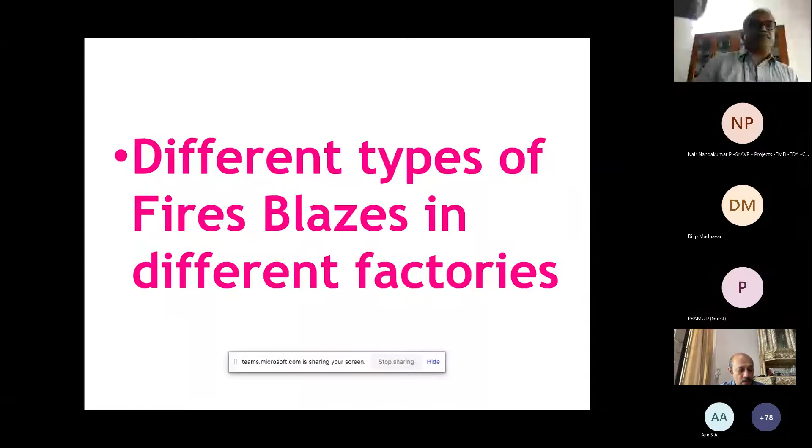Some different types of fire incidents happened in various factories. I am not mentioning the name of the factories, but the processes I have mentioned here, and somebody may identify the factory. That is not a problem at all, because the only thing we mean is what is the key behind this disaster. Paint factories, plastic industries, oil and gas industries, pesticide industries, solvent extraction plant fire incidents, refrigeration plant industry accidents, steel plant accidents, petrochemicals, etc. So many accidents we go through, and so many parameters were involved in the disaster event.

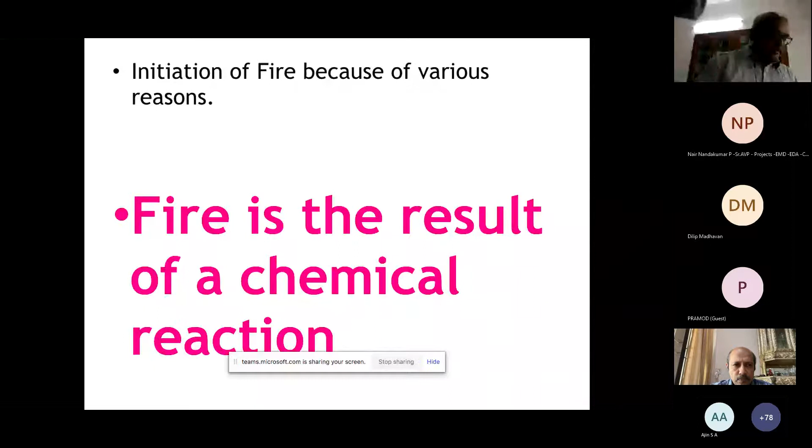Fire is the result of a chemical reaction. Normally in a reaction, reactants are there, products are there, and some energy is also released to the atmosphere. One or more substances, called reactants, are converted to one or more different substances known as products. In some fire incidents, fuel is there, oxygen or air is available, and a reaction occurs. It comes to, normally we say, carbon dioxide and water with some energy released to the atmosphere, and that fire energy creates the problems.

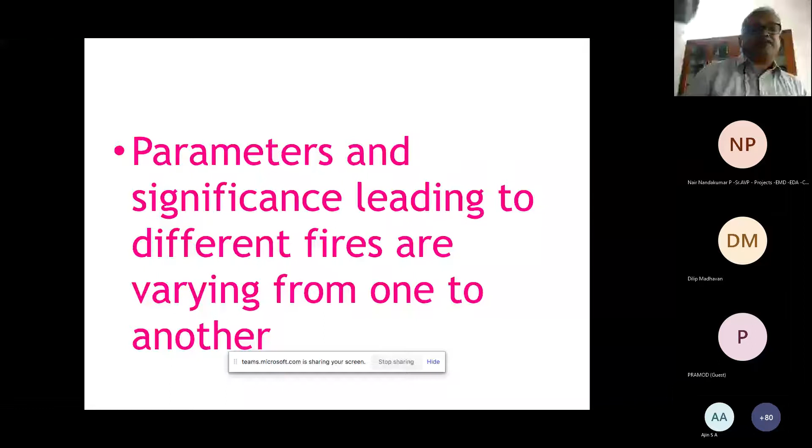The parameters that are significant leading to different fires vary from one industry to another. So the paint industry fire is not relevant to the plastic industry, and the root cause of each one is entirely different. Suppose I take the case study of a fire in a solvent extraction plant.

What happened in that plant is that oleoresins are extracted from spices, and the semi-finished goods are kept in a godown. That godown is supposed to be kept at around 20-degree temperature, in a climatically controlled space. But what happened? The oil extracted from the spices has some traces of solvent present in it. This trace of solvent is vulnerable for a fire incident, so we have to be very careful.

One fine night, with the storage temperature around 20 degrees Celsius maintained with the support of the AC or cooling system, the material stored inside the storage area released a small trace into the atmosphere. That means a minute trace of solvent was released.

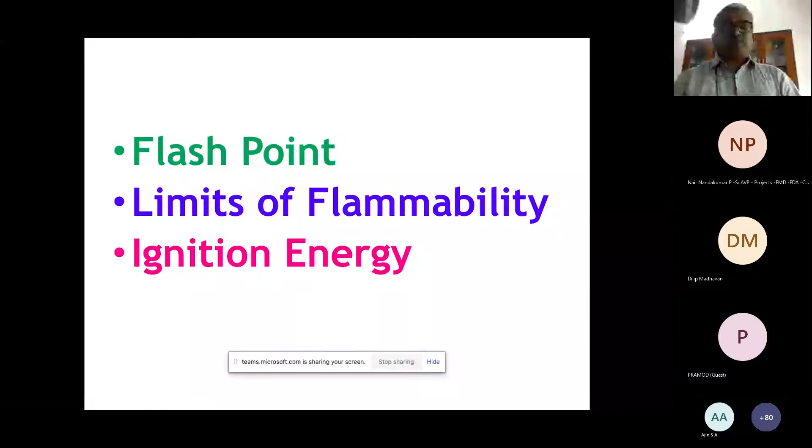But what happened is that on that fine night, the vapors mixed with air, and as some sort of ignition energy was attained, the entire storage system and factory went into a fire. This is why we should have controlled storage, controlled temperature storage areas, because this can generate this type of fire incident.

Normally we don't identify such hazardous areas in our factories, because only a small amount of oil is involved, and the spice oil itself is not a fire hazard to some extent. But the solvent present in that trace amount started to burn. From this, the three points I have are flash point, ignition energy, and limits of flammability.

The significance of these 3 parameters is very important while considering solvent fires in the industries, because the lower flammable limit is around 1 to 2 or 3%, and the upper flammable limit will be around 8%. That means between 2 and 8, the chances for a fire is high, because the air is always available in this area.

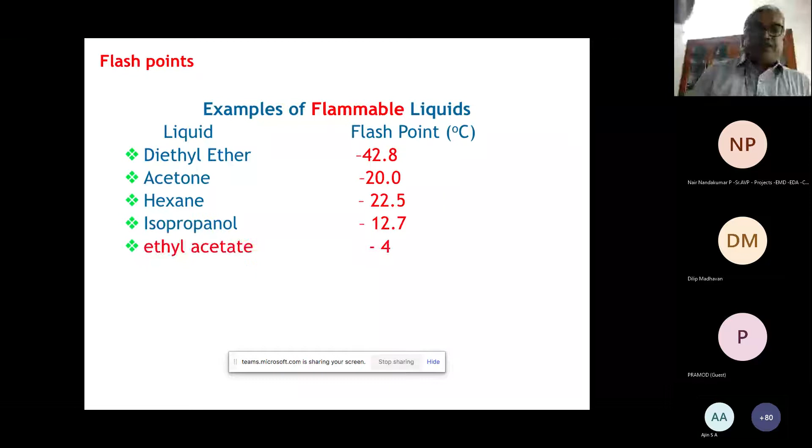Some examples: diethyl ether -42, acetone -20, hexane -22.5, ethyl acetate -4. You have to look into all of these. This means all these solvents are ready for initiating a fire if additional energy is contributed to this atmosphere.

These minus degrees are the flash points. The atmospheric temperature is around 25 or 30 degrees. We have to understand how much lesser amount of temperature all these solvents need. We must be very careful, because in these cases also only a lesser amount of solvent vapor is required.

Most of the solvents are heavy vapors. They will spread around the lower region, and air is always available there. Then the only additional requirement is energy. What is the energy? The unit of energy is joule.

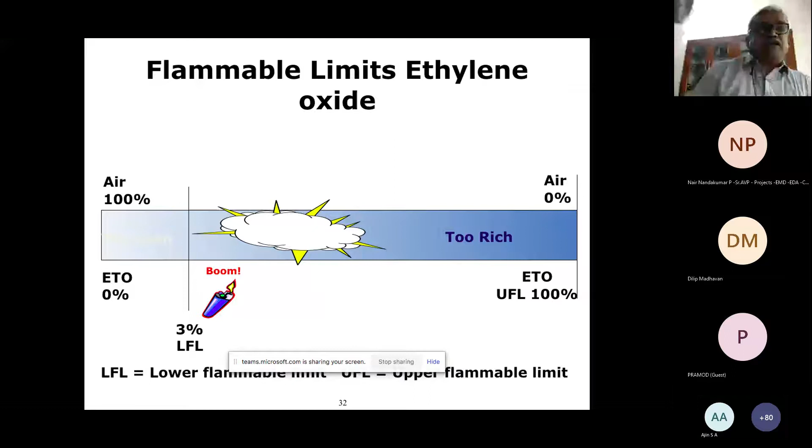In some cases, we can see ethylene oxide, acetylene, etc. They have no upper limit. No upper limit means that type of fire can happen anywhere, even without the presence of oxygen. In a confined area, this acetylene gas can give a flame or explode in any area.

But in other cases, we can see there is a defined region, and that region is very important. For LPG it's 2.1 to 9.5, for gasoline 1.4 to 7.6, and for ethyl acetate 3.5 to 15. That region is very important.

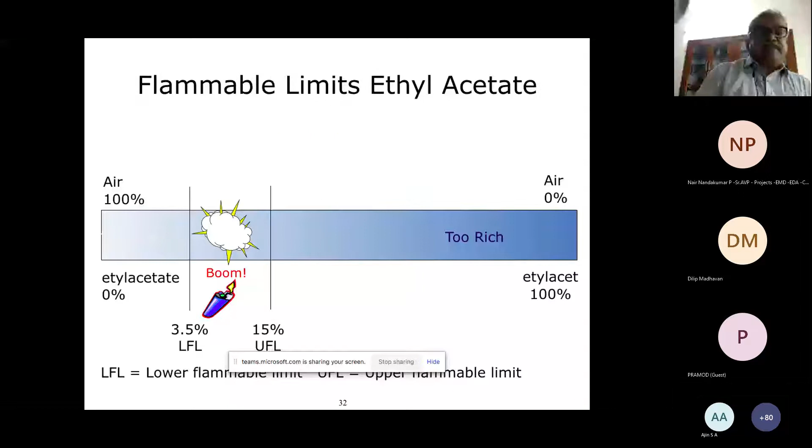This region is, first of all, a chemical reaction. Chemical reaction means some reactants are required, some stoichiometry calculation is required for the initiation of a fire. What is the stoichiometry? That is very important, which I can mention here. For the ignition energy, the energy is also very important - the lowest amount of energy required for ignition.

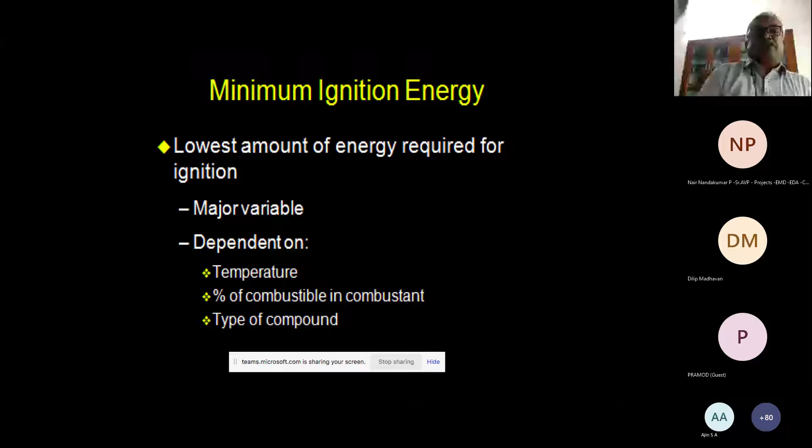Millijoules means how this energy we can explain - that is very important. For discharge to ignite an explosive atmosphere, there must be enough energy. The minimum ignition energies of most hydrocarbons, gases, and vapors range from 0.1 to 1 millijoule. You should carefully listen: 0.1 to 1 millijoule. The level of methane is 0.29 millijoule. A person walking across a carpeted floor can develop a potential difference large enough for a 40 millijoule discharge - more energy than it takes to ignite methane.

That is also something we must be very careful about. A person simply walking across a carpeted floor can generate energy more than the required energy for initiation of a fire - that is very important. Humans generally only sense discharges of 0.6 millijoule or more.

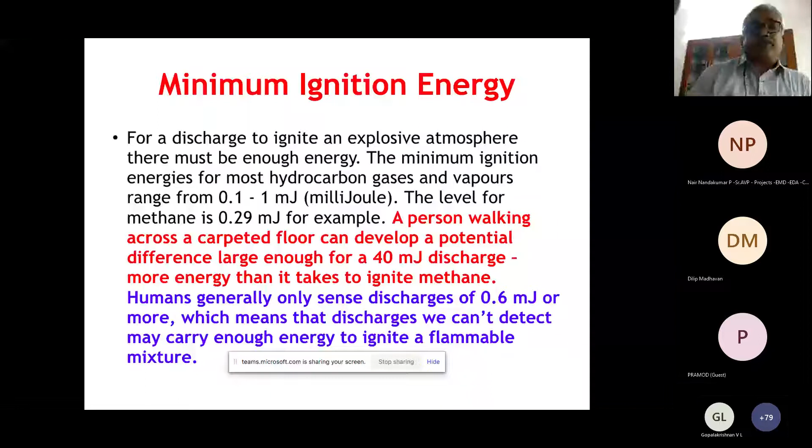Once fuel and oxygen are present, an ignition source is needed to complete the fire triangle. Hydrocarbons can be ignited two ways: when an external ignition source with sufficient energy to ignite the fuel-oxygen mixture is available, in the form of flames, sparks, etc., or when the temperature is raised above the auto ignition temperature - as I already told you, auto ignition, flash point, and fire point.

These three are very, very significant, and we shall look at an incident - a carbon disulfide accident in one of our industries. In that case, what happened is some carbon disulfide fire had some issues. Because the carbon disulfide fire occurred, we could not identify it with our normal eye, so it required smoke detection or radiative heat flux sensors.

CS2 flames produce negligible smoke, like a hydrogen fire - hydrogen fire also is like that, there is no smoke at all. It is relatively non-luminous also in nature, and it shows lower emissivity, and therefore results in lower radiation from the flame.

CS2 is highly flammable. Actually, in CS2 tanks we are supplying water. We take out the CS2 with the help of the top part. We are using the water, and we are processing with water. Then only we handle the CS2.

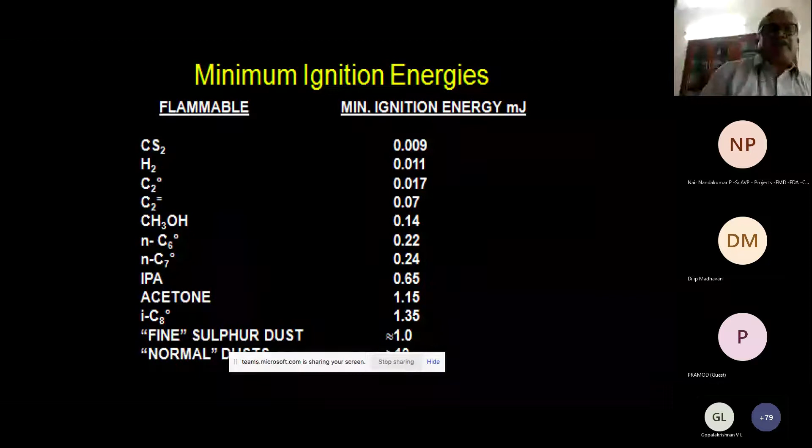Like hydrogen fire - what happened in the factory: the dummy flange of the product transfer line was removed while unloading carbon disulfide, causing carbon disulfide to spurt through the butterfly valve. Being a highly inflammable liquid with a flash point of about -30 degrees Celsius.

That is very important - carbon disulfide transforms into vapor state immediately. This is also a highly flammable solvent. The vapor could have come into contact with a hot body, forming a vapor cloud, causing the explosion. Subsequently the fire engulfed. When it reaches the auto ignition temperature, there is no need for ignition by spark energy - that is also very important. At the auto ignition temperature, the carbon disulfide fire occurs in that industry.

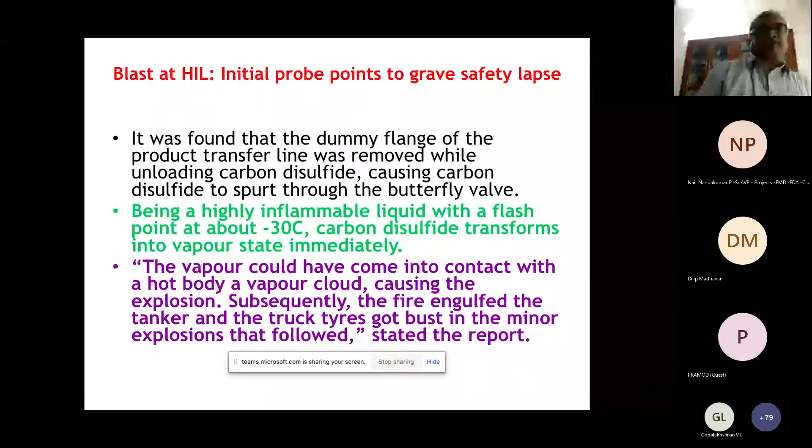After this is the ISO tank. We can see that this type of industry - what you have to do is a special type of procedure, this is a similar chemical unloading procedure.

This response exercise simulates a real-life incident during unloading of toluene diisocyanate, TDI, in order to test the customer's on-site emergency response systems and assess the interaction between all parties involved in dealing with the incident. This is not intended as a standalone instruction film.

The customer operator and truck driver put on the required personal protective equipment, PPE, for TDI, as specified in the safety data sheet.

The operator lowers the walkway to the tank container, and the driver assists the operator with connecting his safety harness to the fall protection device before he goes on top of the truck.

Due to a combination of a defective gasket and unexpected pressure in the tank, the operator is splashed with TDI, falls from the vehicle, and is hurt by the impact with the gantry.

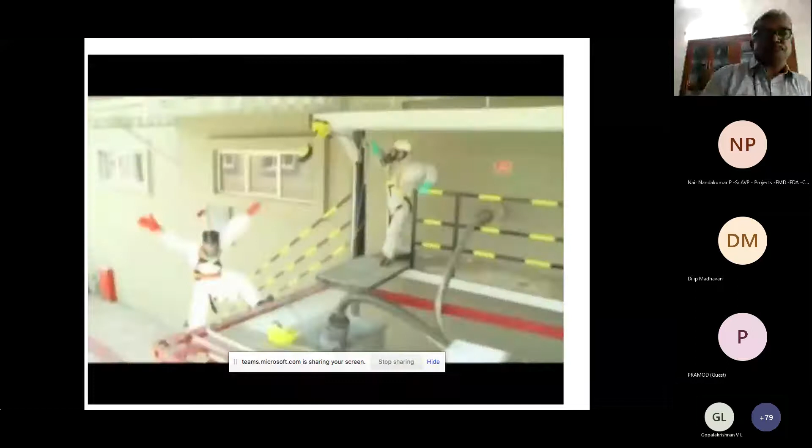The driver immediately pushes the emergency stop button, which automatically raises the site alarm and then closes the vehicle valve to avoid any further spillage. The driver goes to decontaminate himself.

The site emergency team immediately puts on the required emergency personnel protective equipment.

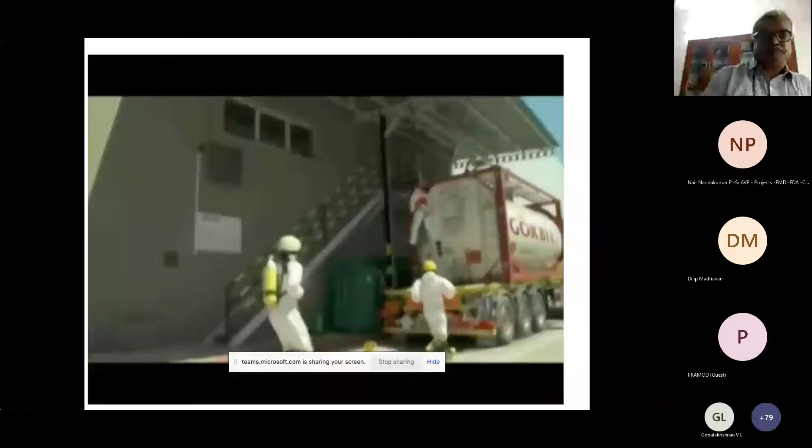A quick response is required as the operator has been saved from a potentially fatal fall by the fall protection system, but is still suspended from the gantry in a life-threatening position. After a quick assessment of the situation, a forklift truck is used to rescue the trapped operator.

It is critical that the suspended person is rescued as quickly as possible to avoid the risk of suspension trauma. Forklift trucks should not normally be used for moving people, but it is the only option available on site to rescue the operator and prevent permanent injury.

This type of rescue system should be provided for unloading such highly flammable solvents in industries. We must be very much careful about all these things. Otherwise, raw transfer or unloading of highly flammable solvents like carbon disulfide will surely initiate a fire hazard.

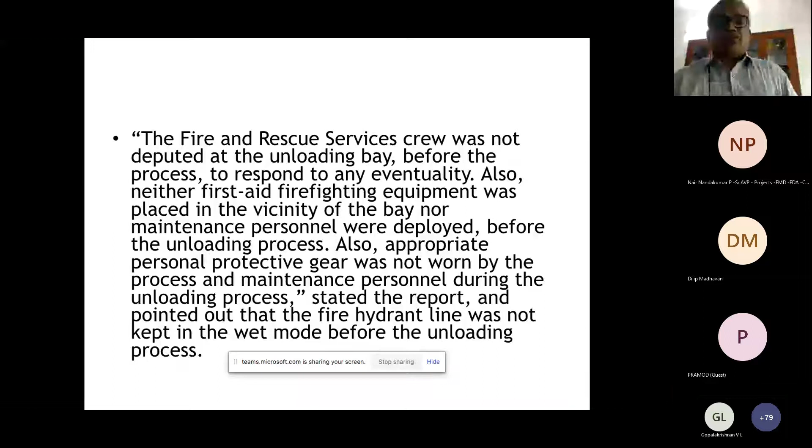And actually, the incident was an unfortunate one, and actually 2 persons died. You can see the pictures of that incident.

Fire detectors work on the principles of smoke detection or radiative heat flux, but these two are absent in the carbon disulfide flame. So we must be very careful, and we must identify using a thermal imaging system like that. Any other system should be introduced, then only we can identify the initiation of ignition.

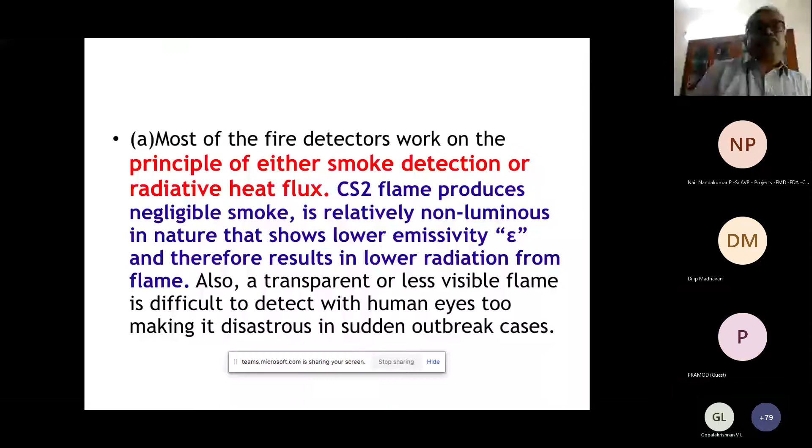And that type of incident also stands for poisonous emission of sulfur dioxide. That is also toxic exposure we have to expect in that case.

The emergency plan, procedures for unloading and safe operating procedures, and lack of sufficient training about the anticipated hazards are all required considerations for this type of incident.

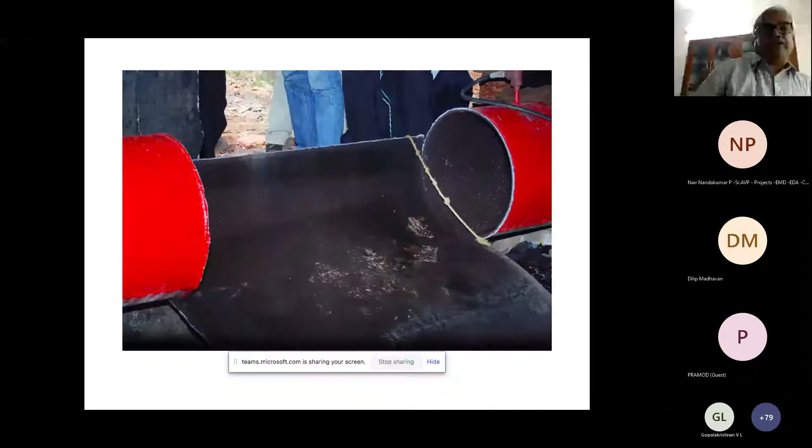Now I am talking about an ammonia gas explosion. Ammonia gas is normally a non-flammable gas, but what I've explained is that it involves a reaction, and a reaction requires certain parameters. Ammonia gas can initiate a fire incident under certain conditions, and we must identify how this happens. At normal temperature, ammonia is non-flammable, but it will ignite at a temperature of 1204 degrees Fahrenheit, within vapor concentration limits between 15% and 28%.

Looking at the hierarchy of flammability, we have highly flammable liquids, lesser flammable liquids, and non-flammable gases. But non-flammable gases can also create a disaster, and we have to identify that risk.

In this case, this is a seafood processing ice factory. They have a compressor, the receiver, and everything else. But suppose the temperature rises - this is a chain reaction, because fire itself is a chain reaction. That means once the reaction initiates, at high temperature around 1200 degrees there is a chance for initiation of fire, whether from high temperature, a spark, an electrical spark, or some other gas explosion. Once that occurs, there's a chance for high temperature initiation, meaning the fire initiates and the flame continues until the explosion occurs. This is what happens - ammonia gas can decompose at high temperature, forming highly flammable hydrogen gas.

As we know, hydrogen gas is highly flammable, and we could not detect it with our normal detection system. Nitrogen dioxide is also produced along with that. In that case too, we can see how this type of accident happens, and we must be very careful.

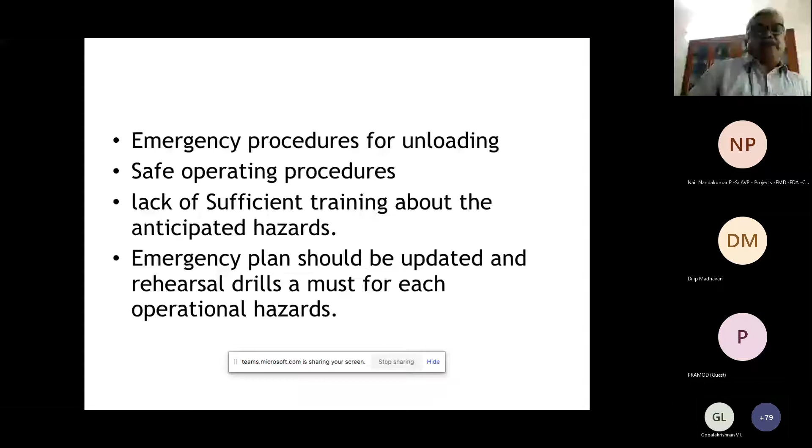In this accident, two people died in the Kannur area. The initiation of fire at high temperature occurred while they were using normal cooking operations in the machine room itself. The gas was heated, fire initiated, and an explosion occurred, killing two persons on the spot. You can see the explosion intensity here - the building collapsed due to the explosion.

That shows a lesser flammable gas can also create a chain reaction - this is also very important, and we should be very careful about it. This type of gas hazard doesn't depend only on flammability; other factors also have to be considered.

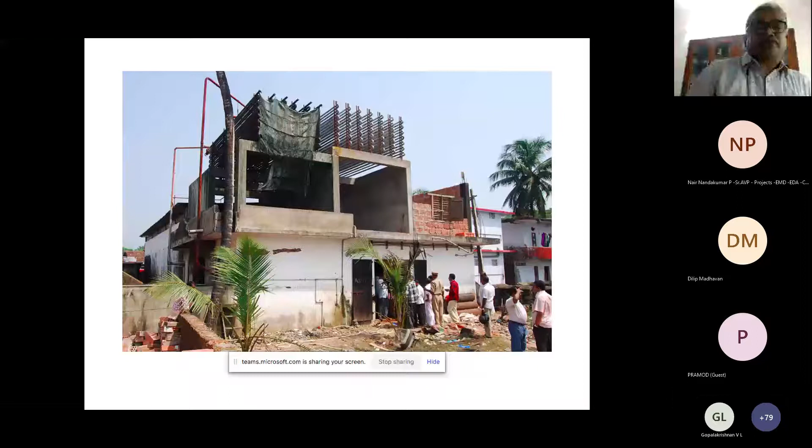This occurred in Valley Center, Kansas, about 15 miles north of Wichita. After the explosion, the fire spread, igniting the contents of other storage vessels and eventually destroying the entire tank farm.

Actually, most solvents are not conducting. Since they are non-conducting, during solvent pumping and transferring you have to be very careful about static energy, because static energy initiates fire incidents in most cases. Liquid flowing through pipes and valves generates static electricity, which can ignite flammable vapor.

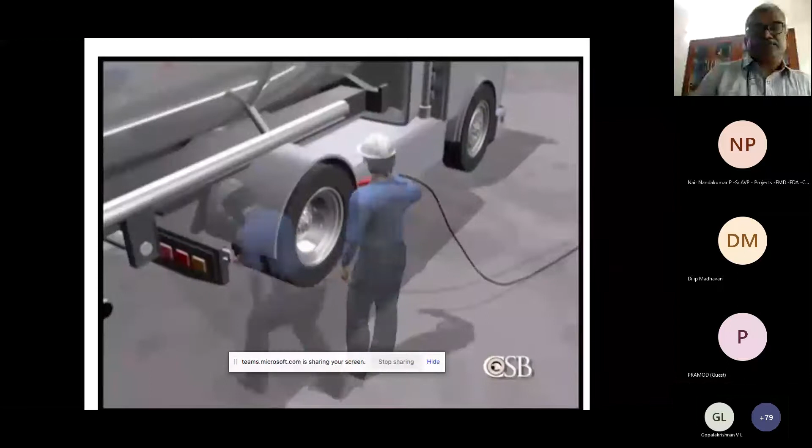The tank farm supervisor connected a cable between the truck and an electrical grounding station. In addition, all the equipment involved in transporting the liquid was bonded - that is, connected together with electrical conductors - and grounded.

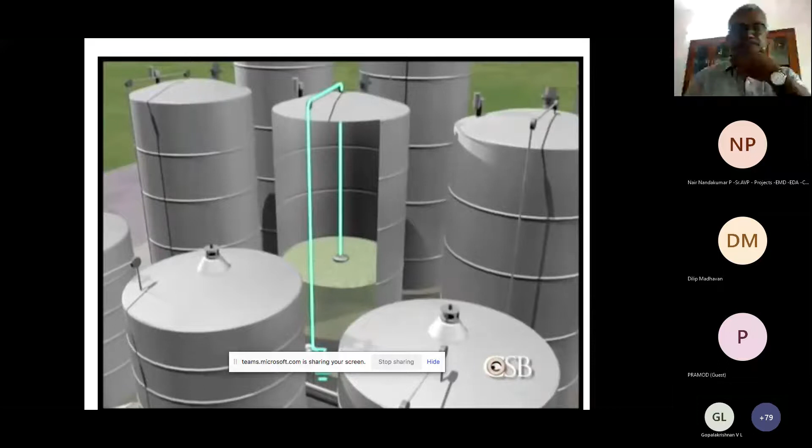Inside the 15,000-gallon storage tank, there was a device for measuring the liquid level. A metal tape, which was grounded, was suspended from pulleys and connected to a metal float by a loose, flexible linkage assembly. This linkage presented a hidden danger during the filling of the tank.

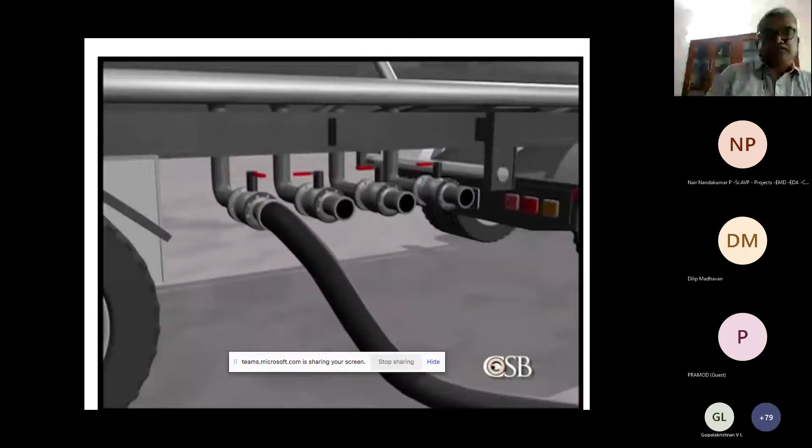The solvent was pumped from three tanker trailer compartments into the tank. As the hose was switched from one compartment to another, air entered the line, creating bubbles and turbulence inside the tank. A static electrical charge built up in the non-conductive liquid.

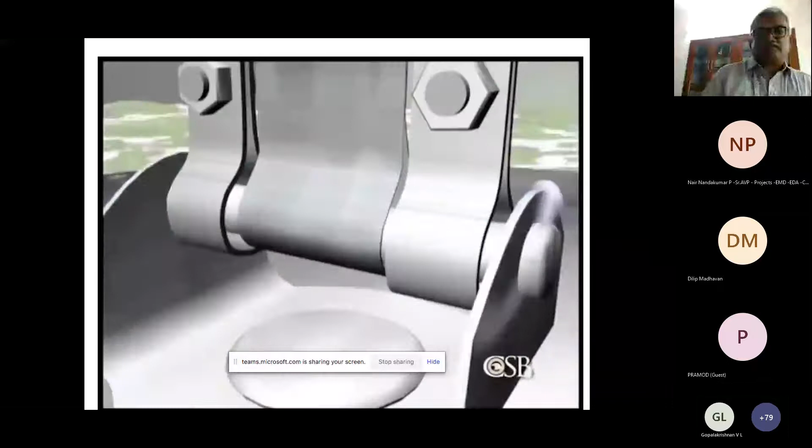Meanwhile, the space above the liquid was filled with an explosive mixture of vapor and air. The swirling, turbulent liquid caused the float to drift and rock, creating slack in the metal tape. This allowed a gap to form intermittently in the linkage assembly, interrupting the grounding of the float. The metal float accumulated a static electrical charge.

About 9 a.m., a spark from static electricity ignited the vapor-air mixture, causing a massive explosion. The blast sent the storage tank rocketing into the air. Two more tanks quickly ruptured and released their contents into the rapidly expanding fire. As the fire raged inside the tank farm, other tanks burst and ignited, launching heavy steel tank lids 10 to 12 feet in diameter into the air.

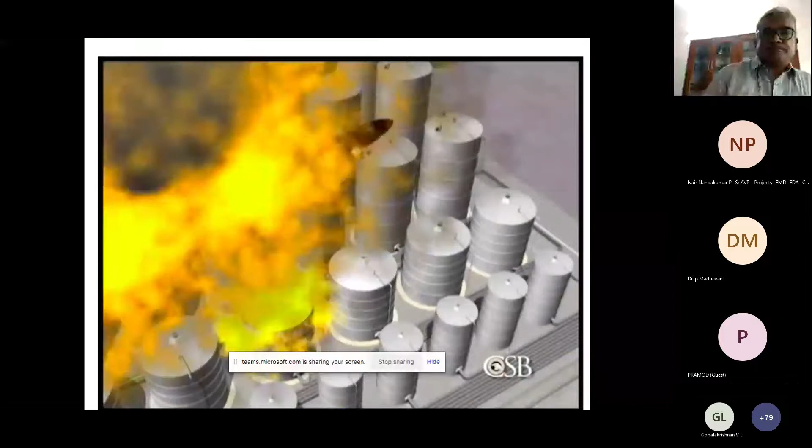20,000 gallons of flammable liquid were released into the spill containment area. Valves, pipes, and other heavy steel objects were hurled off-site and into the adjoining community. One tank lid struck a mobile home about 300 feet away. A pressure valve hit a neighboring business 400 feet away.

This is also very important. We have to consider all types of such hazards, because during unloading operations, we are connecting the tanker to this strips, but we are not at all considering the other equipment used inside, like the float and the connecting rod, etc. We must be very careful. Otherwise, that will also create a highly hazardous situation and can initiate a fire.

This huge loss in the Barton solvent fire, we all know, some huge quantity of solvents has charred into fire, and all this is a loss. In this case also, we have to be very much careful about flammable liquid properties, flammable solvent properties, each and every significance of each property, we must be very careful.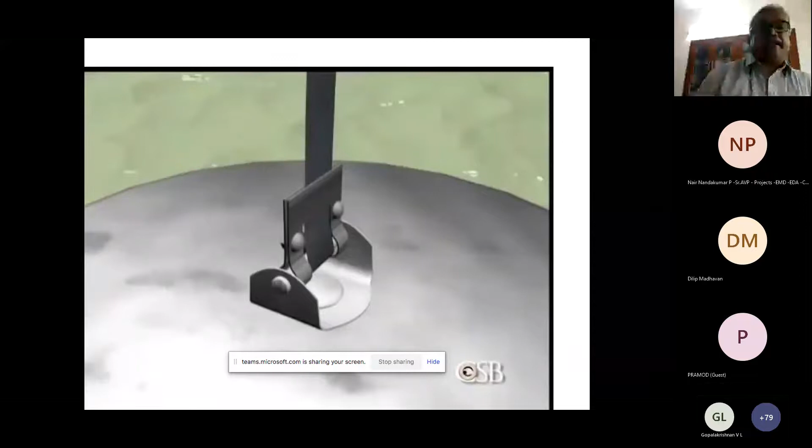Otherwise, even one parameter can destroy all these or initiate a fire situation. In this case, static energy initiated the fire. Normally, most solvents do not conduct electricity. With non-conducting solvents, we must be very careful about earthing or neutralizing the energy created inside the filling process. That also we must be careful about.

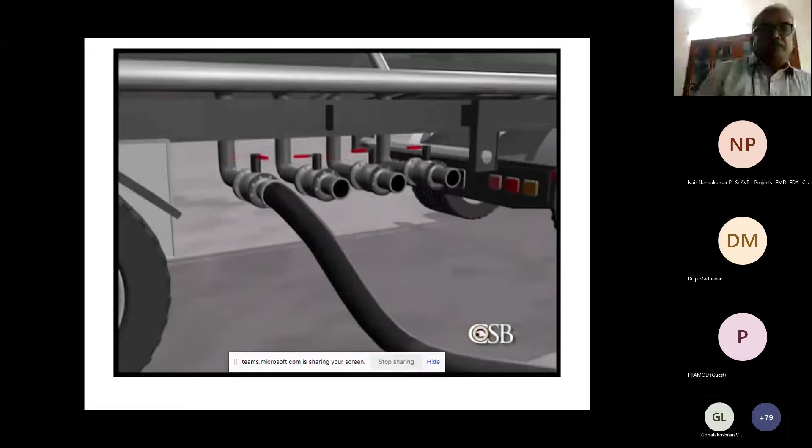The solvent was pumped from 3 tanker trailer compartments into the tank. As the hose was switched from one compartment to another, air entered the line, creating bubbles and turbulence inside the tank. A static electrical charge built up in the non-conductive liquid.

Meanwhile, the space above the liquid was filled with an explosive mixture. Another special case is the Vizag steel industry fire. Here is how it happened. In this accident, 16 workers, including some officers, were burnt alive following a huge explosion in the recently commissioned oxygen plant at the Vizag steel plant.

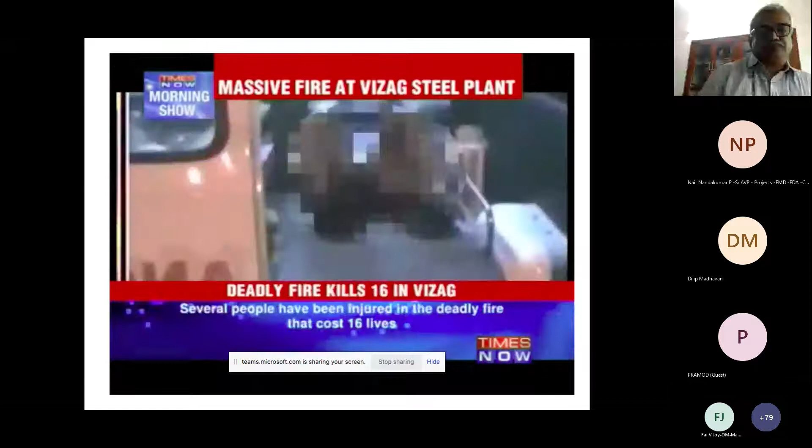This being not a lone incident, with 4 incidents reported in less than a year. Are the authorities turning a blind eye at such incidents? Diligent workers of the Vizag steel plant did not see this coming when they arrived for work. An explosion in the oxygen unit of the plant led to a massive fire, killing more than 10 people. The numbers might just shoot up. But this is not the first time a fire has claimed innocent lives at the Vizag factory. This, in fact, being the 4th such incident in less than a year, with no clear reason behind the explosion given yet. Question is, was this a case of negligence or just another accident at the factory?

Bureau Report, Times Now. This is especially important: we have to consider that non-flammable chemicals also can lead to fire, because fire is a chemical reaction. As I have told, reactants present, pure reactants in the presence of air, we are substituting with oxygen, meaning the enrichment of oxygen leads to fire in most cases.

That means in our factory, we may consider it a non-flammable unit, but we have storage of oxygen line or oxygen storage. In any case, there are chances of releasing that pure oxygen into the atmosphere, meaning substances that do not burn under normal conditions will burn immediately.

This is the case of the steel industry. One oxygen line is passing through inside the plant, and the oxygen line ruptures and the oxygen enters into the atmosphere. Normally the oxygen level in the atmosphere is around 21%. The oxygen level shot up to 40%, meaning anything that could not normally burn can burn around 27% oxygen concentration.

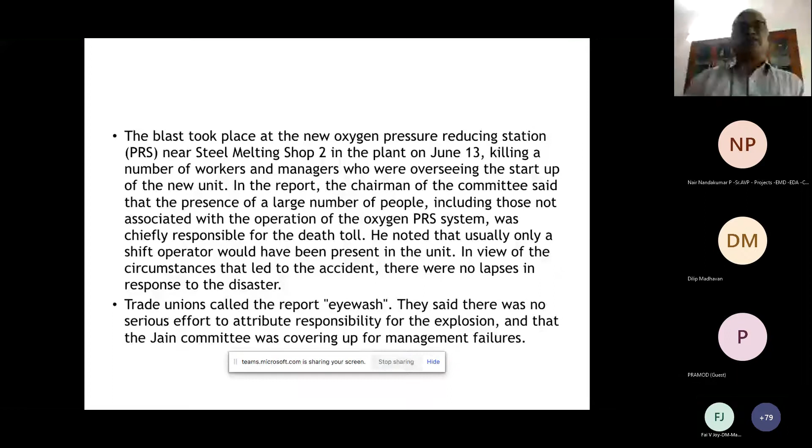These are other cases, recently in Trivandrum 2018. One, we all know, is the family plastic fire issue. Plastics are considered to be non-flammable, but we have to be very careful. Plastic, after reaction, will come to the plasma stage.

The plasma stage, which is the fourth stage of matter, can easily initiate the spread of fire accidents and can be a very, very disastrous situation. Around 1,000 people are working in the factory.

The entire factory has started this stage. That means the hierarchy of flammability is not an issue. In a reaction, what are the parameters supporting the initiation of a fire is very important. To avoid this, we should have a clear study of all the materials and all the properties in mind.

These are the fire incidents only I have mentioned. The other incidents, toxic release incidents, are there. The other exposure incidents are there. This only I have peripherally gone through, but detailed investigation reports and detailed study reports, everything is with me, and in 45 minutes I could not explain all these things.

This means the hierarchy is very important. Not only the hierarchy, because highly flammable, lesser flammable, non-flammable, all these types of substances can initiate a disaster situation, not only the highly flammable chemicals. That is the case I can share on this special day of disaster, this risk reduction day. Thank you for giving me the opportunity, sir, for sharing my views about all these things.

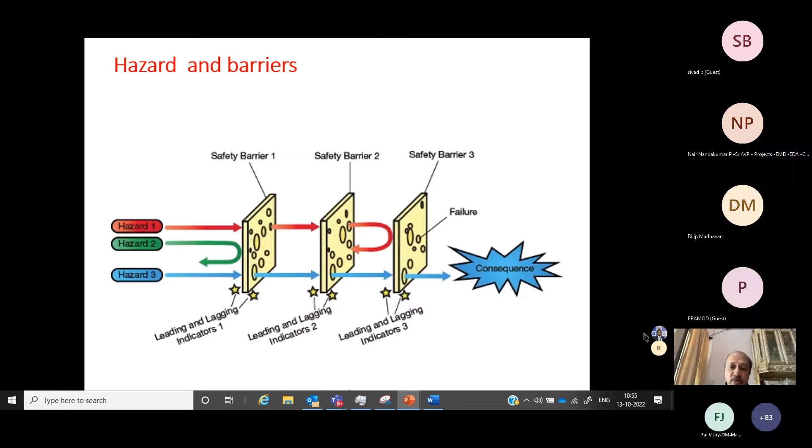As we all know, disasters happen because the hazards align with the barriers through which, or whichever barriers we are having, if barriers are failing, and a sequence of barriers failing and aligning together will result in a hazard becoming a disaster.

Conceptually, when we do the design from concept onwards, the hazard assessment or analysis and identification will have to result in the design of multiple barriers, which will prevent a disaster from happening. So the slide shows different types of barriers in a typical industrial facility.

This can vary depending on type of facility. This is a typical hydrocarbon facility, typically offshore, so you have multiple types of barriers. One is structural integrity, that is one type of barrier. Then you have process containment. Then you will have ignition control.

Then the next one is a protection system, which will prevent a hazard from becoming an incident. Once the protection system fails, subsequent to that you need to have a detection system which will identify if some event has occurred, coming subsequent to the protection system. If a detection is done, then you need to do a shutdown, a safe shutdown of the system. So the shutdown system becomes another layer which will prevent a disaster from occurring.

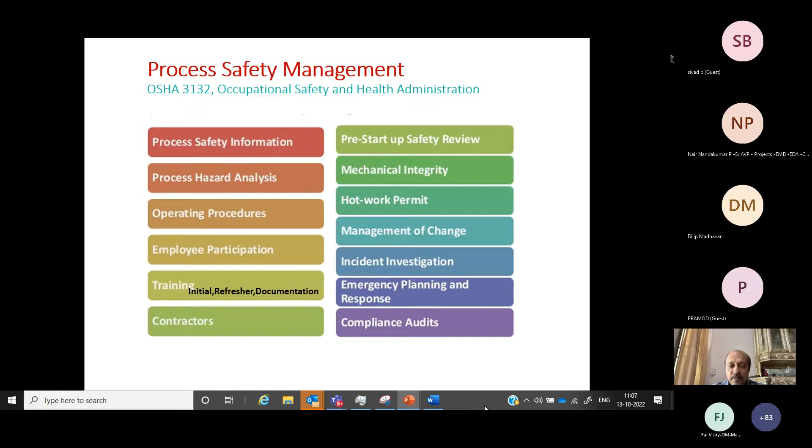Can go to the next slide, please. So in the life of any chemical plant project, first there is a feasibility study, then a detailed feasibility study, then front-end engineering, and then of course the EPCC - engineering, procurement, and construction contract - which is the building of the plant, and then we go to the operation phase. Sometimes we start the hazard analysis during the detailed feasibility study itself, but FEED is the prime time when we go for hazard analysis and risk studies.

This is an important phase wherein we identify hazards, a risk assessment is done, and we find what barriers and protections we need to incorporate in the design of the plant so that a disaster can be prevented when the facility is under operation. It is impossible to incorporate most of these things once you start operation, because you may have to stop production and totally revamp or redesign the plant.

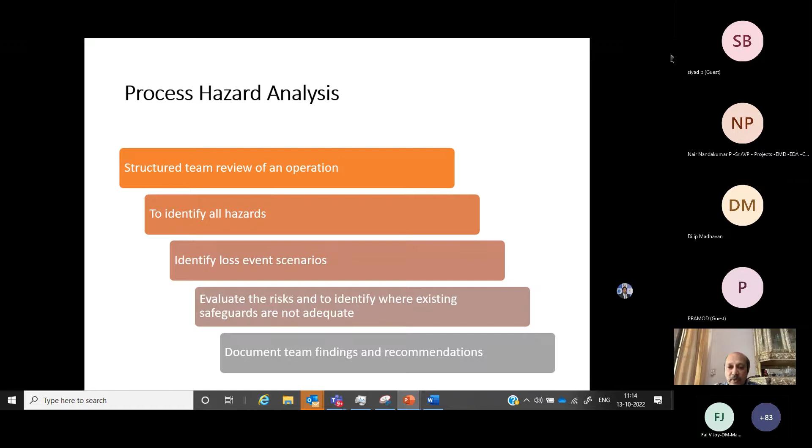So for any process plant, we have multiple layers of protections. The lowest is the process design. The design itself can be an inherently safe design. But you cannot design all designs as inherently safe design. Obviously, hazards will be there and the risks can be varying. So once the process is there, you need to have process control to limit the process within safe operating limits. The process control devices are essentially needed to limit the process from varying into unsafe domains. So the safe process has to be controlled.

Safety as well as the safe operation, as well as the original intention of the process - the ultimate process target objective is to create some product. That also is there as part of the process control objectives.

The next layer will be alarm, which will show that the process is deviating towards an unsafe limit or going beyond the safe operating limits. So alarms will be required where the operator can intervene and bring the process back to the safe condition or the desired condition.

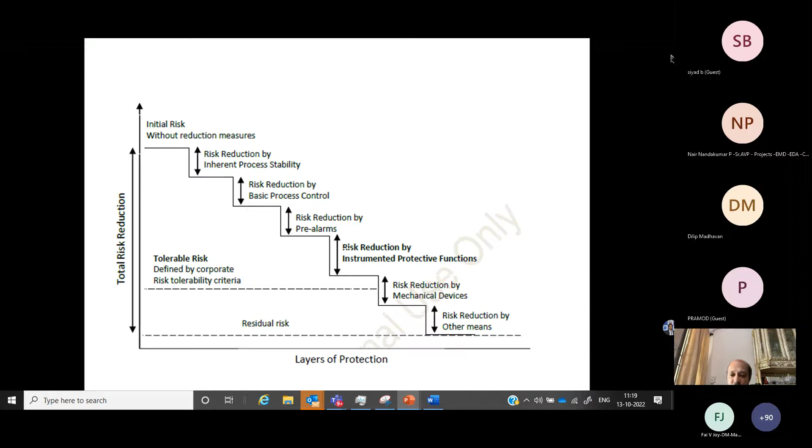The next layer will be the pre-alarms or alarm systems. The next layer will be the instrumented protective function or safety instrument functions - you call it IPF or SIF in different regions of the world. The next one is mechanical devices or active measures. The next layer will be other means, including passive measures and next layers like community emergency responses.

This is always reiterated because you have multiple layers possible, and depending on the effectiveness of the inside layer, we may not have to go to the outer layer, so that you are far removed from the disaster. So as we move outward, we reach the disaster situation.

So this one is the most important one after the process design, which is a basic one, where we try to design an inherently safe process. Outside that, the process control will be also part of the process design.

But subsequent to that, when the process starts varying towards an unsafe condition, the first layer of protection is our alarm for the plant. The bottom green one is a normal condition, then you have the alarm condition where the operator has to be notified and take appropriate action. So the operator should have adequate time to react. The process design is the process reaction time, or the time to take an action.

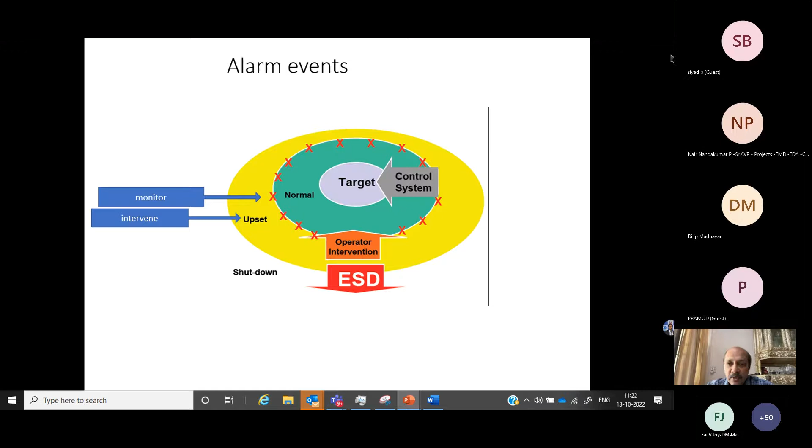So for alarms, starting from the FEED stage or EPCC stages, you need to have an alarm management process, which is required for any plant, because unless you have a good alarm system, the operator may be flooded with so many alarms. It becomes difficult to manage the alarms, and too many alarms will make the operator complacent, so he will ignore all alarms. So you need to have only the alarms which are required, coming with adequate time to react. This is called alarm rationalization.

First of all, you need to eliminate unnecessary alarms and provide only the alarms which are required. Then even the set points will have to be adequately changed so that you don't get an alarm too late. So for alarm management, you need to have a philosophy.

I will briefly go through this structure. You need to have a policy or philosophy of the alarm, and then identify each alarm, just like hazard identification and hazard analysis. You need to identify all alarms in the plant, and then a process called rationalization, in which you evaluate each alarm, whether it is really required, what is the risk of each alarm, and what is the priority of each alarm - low priority, high priority, or maybe not required at all.

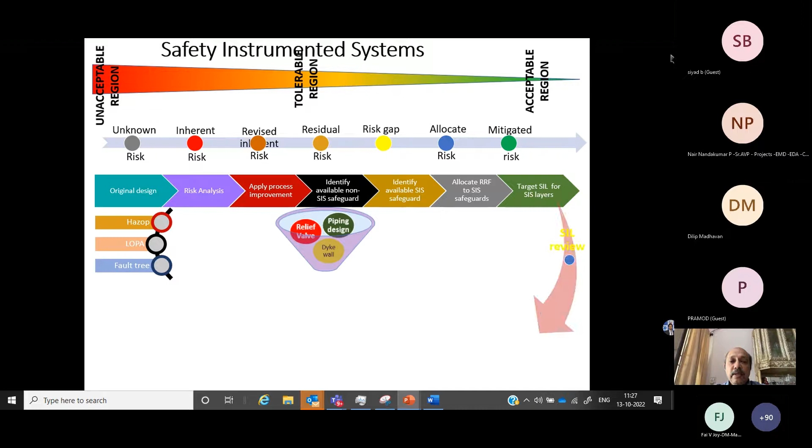Then you need to identify, when you identify all the risks, you will see the inherent risks, and then you need to do a risk analysis, and apply some process improvement, which is the red one in the middle.

That step, you can go back please. The process improvements will result in a revised inherent risk.

Then you identify what is available safeguards. With available safeguards, you will reduce the risk further down, and the residual risk will be there. Then you need to do whether any gap is there in the risk to bring into the acceptable region or tolerable region.

Using this, identifying available safeguards, and then you need to allocate risk. Each risk has to be allocated to some sort of new safeguard. So once you identify the safeguards, then you identify what sort of performance requirements are required there for each safeguard. So each safeguard will have to be given a particular reliability value.

It's not like you have multiple reliability levels. So if the low risk has to be handled, then you have low integrity level required for the safeguard, like SIL 1, SIL 2, SIL 3, SIL 4.

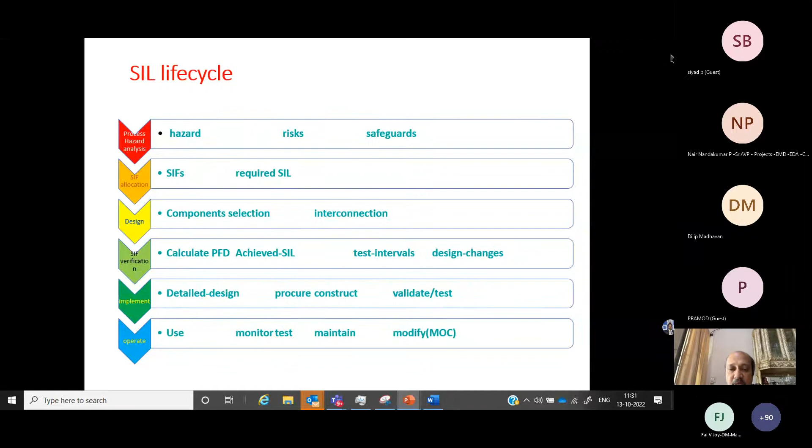Before the construction, the design stage itself, you need to specify what type of safeguards are required. So there is a whole domain of activities. Different trained people with certification, they have to do studies, analysis, and recommend what performance standards are required for each equipment, which is involved in the safeguarding systems. Can go to the next one, please.

So the safeguard system, that particular topic which I'm covering is a big topic, because we need to do a lot on that to have a good system implemented. So it's a preventive layer basically, which will prevent a hazard from becoming a disaster.

So after the preventive layer, you have a fire and gas detection mapping, which is a fire and gas detection system typical for most of the plants. You can go back, please.

So this fire and gas detection system, conventionally it used to be implemented in a prescription-based method. Like they will say that, oh, this particular vessel or tanker, you can have two detectors on both sides or on top of it. So that sort of design used to be there as a prescription - they will prescribe what is required, what is required.

And it has now changed to a risk-based or analysis-based method, where you have to do a mapping. Please go back.

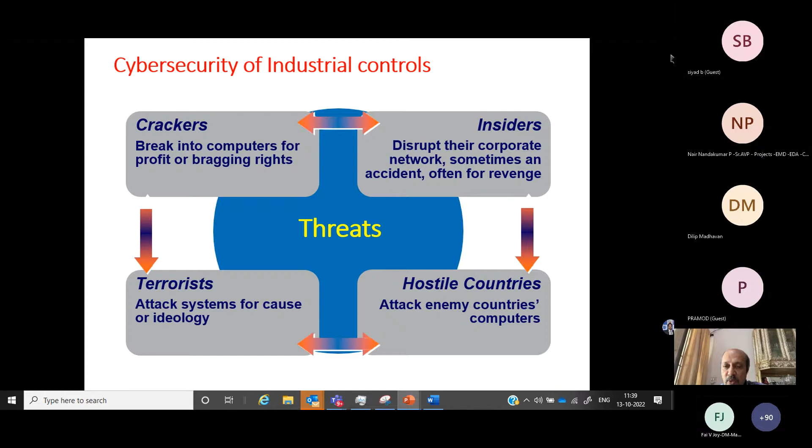So this is another consideration requiring a proactive approach. Next we will explain what type of cyber threats are there—it can be like Trojans, viruses, or worms. These can come in different modes.

It can enter the system, whether it's a distributed system like in our case, even the water authority and electricity boards all need to be protected, because we never know, advertently or inadvertently, by purpose or without knowledge, some virus can come in and create problems and damages.

It is a big topic. We have a lot of statistics on what damages and issues were happening around the world. In Saudi Arabia, when I was there in Qatar, I think 15,000 computers were affected and had to be replaced because a deliberate virus was introduced by Iran into Saudi Aramco systems. So this is not an old story, 10 years back. There has been an increase in the number of attacks in recent times.

We can go to the next one, please. So this one is a cyber security management system, which any organization that utilizes computerized systems will have to have, where you prevent and consider the risk. Again, the risk PHA is involved there. You need to consider the threats and vulnerabilities and quantify the risk. Based on the risk, you need to put preventive layers so that an external agent or threat cannot come into the system and result in a disaster. There is an industrial standard, the IEC standard, International Electrotechnical Commission standard 62443.

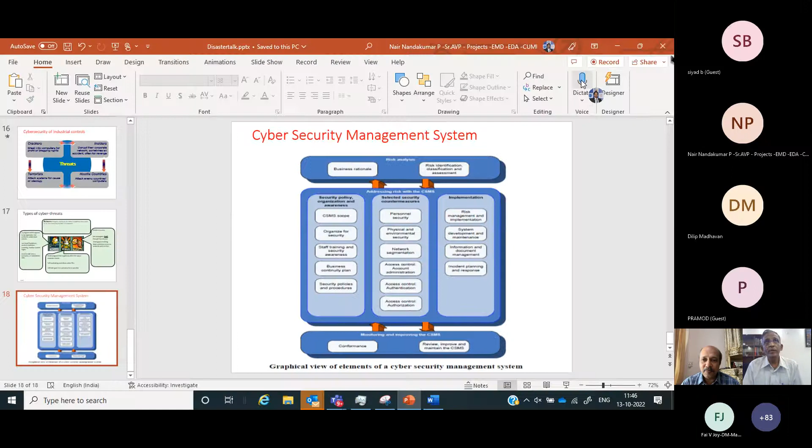At this point I can just add, we had a detailed one-day class in the NSC sometime back for all our engineers in different plants. So I think we should repeat it for more people, sir. Yeah, surely, sir, surely we can plan the same subject in a detailed manner. We will come to you, sir.

Okay, I think that will be Madhuri, okay.

Sir, we have received in the chat box a lot of excellent session comments. I think Srimati Madhuri, she's from Goa, she has participated and she has given her opinion. Excellent session, and that's all. We will be going to the next session.

Sir, she is asking about, is there a list of antidotes to all chemicals as per MSDS? I think whether you can answer or it is to Siyad. No, it should be to Siyad, I think. Siyad, I think Siyad will be here. Siyad.

He's not there. Eh? Yeah.

Mr. Siyad, there is a question from Mrs. Madhuri. She has asked: is there a list of antidotes to all chemicals as per MSDS? Is it available in the MSDS?

Not available in MSDS. Actually, symptomatic treatment is given for chemicals. The treatment side falls under occupational health and occupational medicine. For example, if suffocation occurs, treatment for relieving symptoms is provided through medicines. It's symptom-based treatment; no specific antidotes are prescribed. That will be decided by the doctors. It's not specified anywhere.

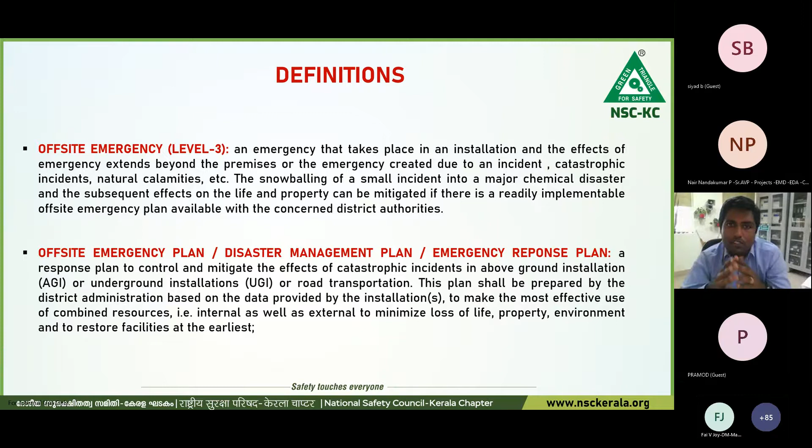It is a plan to control and mitigate the effects of incidents in above ground installations or underground installations or even road transportation. To prepare this plan, we need extensive data. And the plan is not prepared by an industry alone. It has to be prepared by the district authority, for which the information has to be given by the respective industries.

Aims of a disaster management plan: to safeguard and preserve lives, property, and environment, to contain and control the incident, and to restore normalcy. You might have heard these terms in some other context also. I'm just mentioning the aims of a first aider to relate it. Those who have undergone the certified first aider course might have learned the aims of a first aider - to preserve life, to prevent harm, and to promote recovery. You can relate this: the aims of a disaster management plan is to safeguard lives, to contain the incident, and to restore normalcy.

Just for theoretical background - what are the statutory regulations on disaster management in India? We have broadly around 15 acts or codes or rules which mention something on disaster management. Many of these are already known to you: the National Disaster Management Act, State DM Policy, Chemical Accident rules. I'm not going to read out everything, it's self-explanatory.

The important part is the district administration shall coordinate and monitor the implementation of the national policy, state policy, national plan, state plan, and even the district plan. So here the district administration is the whole and sole responsible agency for implementation of all these acts and rules.

Just to continue, an on-site emergency plan is mentioned in a couple of laws, like Rule 12 of Kerala Factories, and there's a rule called the Kerala Factories Major Accident Hazard Control Rules 2005, wherein it mentions that every occupier should prepare an on-site emergency plan. Also, Rule 13 of MSIHC rules requires the occupier to prepare an updated on-site plan containing the details. So there are two rules which specifically mention the on-site plan.

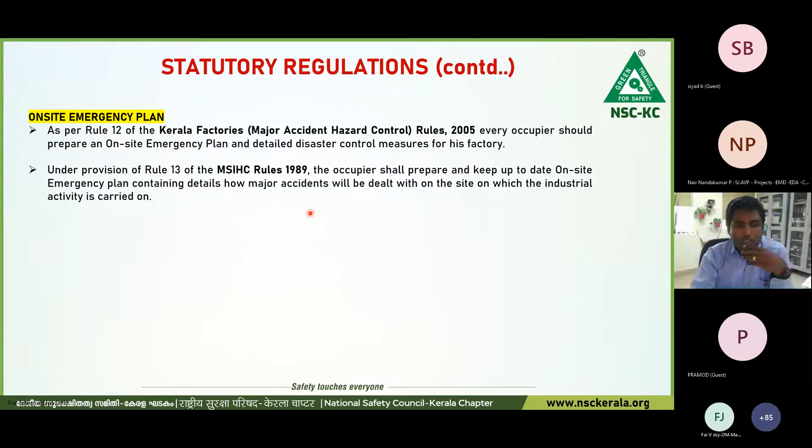Regarding offsite, Rule 9 of the Chemical Accident Rules 1996 and Rule 14 of MSIHC rules mandate the offsite emergency plan. The offsite emergency drill frequency is annual, once a year. The district authority decides which industry to select for the drill, and it has to be executed accordingly. It's not that each industry has to conduct an offsite drill every year - that is not possible. It has to be decided by the district authority. The only thing an industry can do is keep requesting the district authorities to carry out a drill in their respective area of operation.

Now, the major chemical industries in Ernakulam, as per data in 2015, number around 23. You can see all these industries are MAH installations - major accident hazard installations. Do you know what a major accident hazard installation is? It has to be notified under Schedule 2 and 3 of the MSIHC rules. FACT has 1, 2, 3, 4 units, and even BPCL has quite a number of MAH units in the district. And even Petronet LNG, where I'm from, we are also a major chemical industry in Ernakulam.

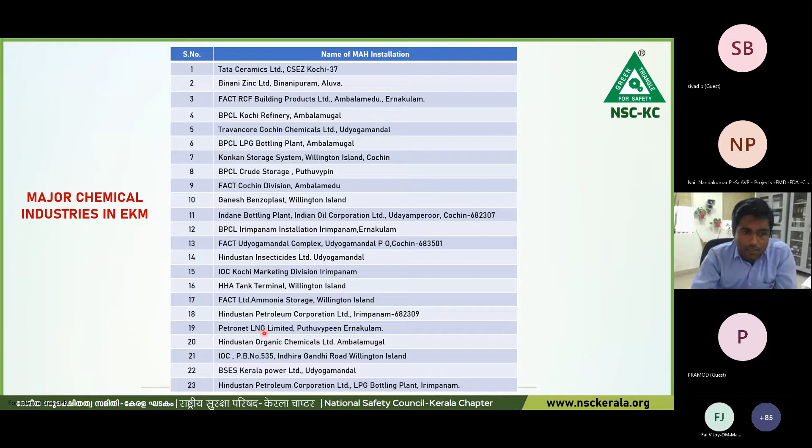So an MAH industry is considered to be a more risky handling industry, handling more inventory, where the possibility of an offsite emergency cannot be ruled out. So the focus of chemical emergencies in Kochi is mostly towards these kind of industries. Not that other industries cannot have the potential of an offsite emergency, but our focus is on these.

What are the offsite data required for hazard, vulnerability, and risk assessment? As I explained, there is a huge exhaustive data which is required, unlike the on-site emergency plan. For an off-site plan preparation, we need the district profile, area boundaries, administrative divisions, geography, topography, even the meteorological data, the demography, population, agricultural productivity, animal husbandry, education, festivals. All these contribute towards better preparation of an off-site emergency plan.

The hazard profile, the natural hazard profile - which seismic zone Kochi is in, what is the wave height for a tsunami in this part of the world, is there any epidemic or pest attack prone areas, are there technologically triggered points in the hazard profile - all these are very important. List of chemical industries, inventories, emergency communication flow chart, reconstruction. Some of these duplicate with the on-site plan also. We can see the data for preparation of an offsite plan is very exhaustive.

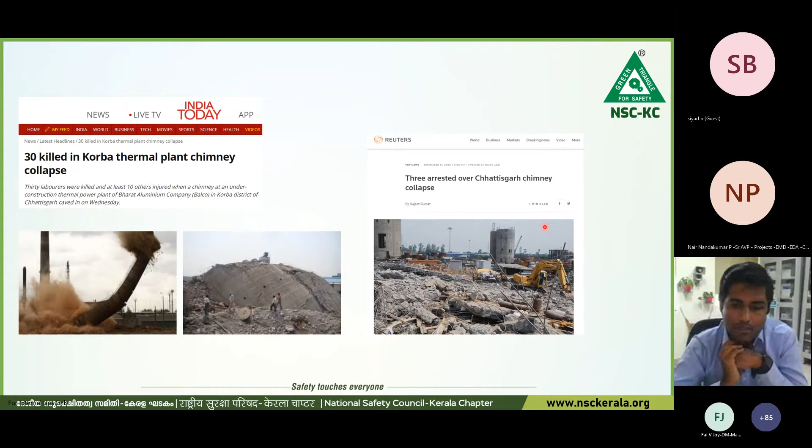Very bad days, around 6 to 7 days - we were all in rotating shifts doing rescue operations and rehabilitation operations. So the point is whether this emergency is on-site or off-site. It's a pretty simple question for all safety professionals. Yes, this is within the boundary premises and considered to be an on-site emergency.

But what happened during this emergency is there were multiple casualty losses - even more than around 43 people died and more than 100 injured during this collapse. And there was absolutely no possibility for the on-site team to attend to this emergency because of the public riot, or the mob riot you can say, at that time.

What happened is the Biharis and the North Indian laborers who actually suffered fatality from this collapse - their family, friends, and colleagues all started protesting and setting fires in the nearby buildings. They did not allow the ambulance to come to the spot, threw stones, and beat up all the people in the plant.

The emergency responders could actually not start the rescue operations till around 3 to 3.5 hours after this incident happened. So then finally the government authorities, in the presence of the district collector, came out with a plan. They came in with all their equipment and tools, concrete cutters, breakers, JCBs, hydras, and started the rescue operations. We were extending support to them.

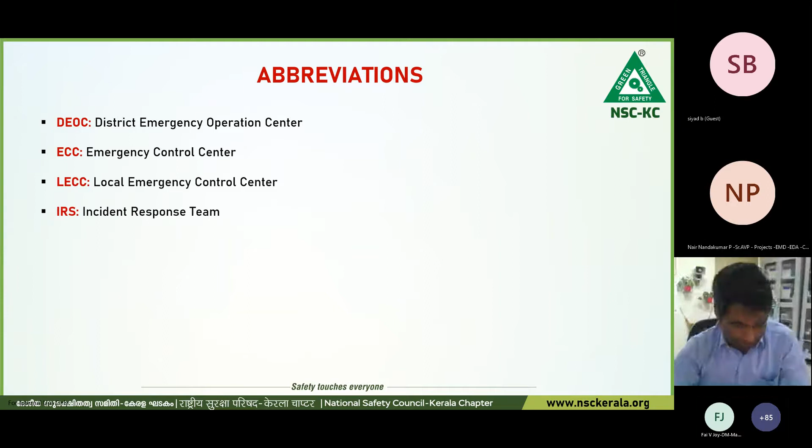Pre-planning is always important for an off-site emergency mock drill, even for on-site drills. The first pre-planning happens through a coordinating conference, normally chaired by the Deputy Collector Disaster Management for the city of Kochi, and attended by government officials like police, fire services, F&B, hazardous industries, etc.

The key objective of the conference is to conduct the mock exercise, spread out the scope of the exercise, select the industry, decide the date, identify who all have to be involved, and which media to cover. So this happens in the pre-planning.

After pre-planning, a tabletop exercise happens. Many of our industries are conducting tabletop mock drill exercises also. We have competitions on tabletop mock drill conducted by NSC last year, and even industries like FACT, I personally know, have been doing excellent tabletop exercises.

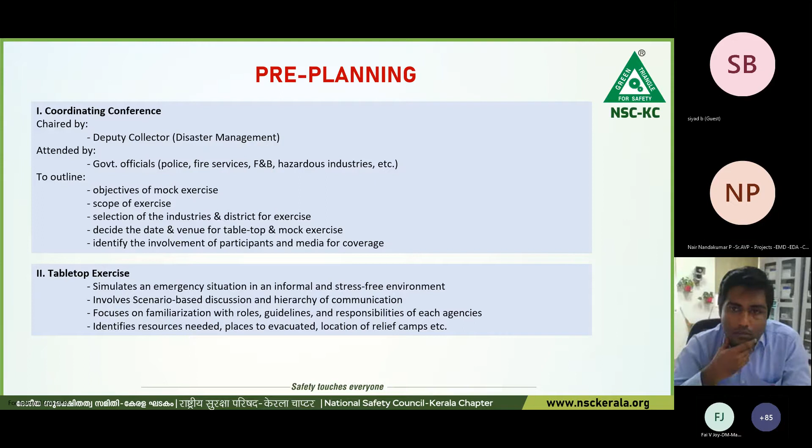It's very important, because in a tabletop exercise we actually simulate the scenario, not in the field, but across the table. Each role member, each emergency response member, points out what their role is, and they actually enact it, mimicking what they're going to do in such an emergency situation. Once the tabletop is completed, then we go for the actual drill.

So the date is fixed. Now, some more guidelines. There is an emergency siren code for each industry, not only for on-site but for off-site emergency also. If you refer to PNGRB, the Petroleum and Natural Gas Regulatory Board, which governs all hydrocarbon or oil and gas industries across the country, there are actually 3 levels of siren code.

For level 1 on-site emergency, the code can be decided by the entity or industry, depending upon the size and complexity. So I can decide my emergency level 1 siren. That is what PNGRB says.

But when you go to level 2, PNGRB guidelines are very clear. You have to have a wailing sound, an up and down siren, for 2 minutes duration for level 2. Level 2 is when an emergency may require mutual aid support, like the state fire and rescue team and other nearby industries for controlling it, and it can escalate anytime to level 3. So level 2 emergency is more critical, as the name suggests.

For level 3, which is an off-site emergency, the siren code is a little different. We have a wailing sound, up and down, for 2 minutes, followed by a 1 minute break, then again wailing sound for 2 minutes, 1 minute break, and then a final 2 minute up and down siren. So the total duration of an offsite siren is 8 minutes, as you can see.

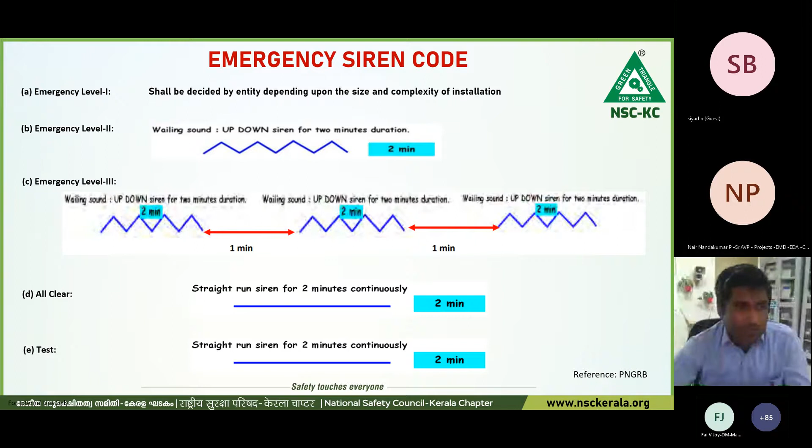PNGRB says that the emergency siren has to be tested once a week. This practice in Petronet we follow every Saturday at 10 o'clock. We give a public announcement, and then we test the siren with a test run. And of course, the emergency siren is blown during the emergency drills, which happens once in 3 months. So unlike MSIHC, PNGRB guidelines say the emergency response drill or mock drill has to be conducted once in 3 months.

Now, there is also something called an emergency control center. We all know about our own ECC. After the session, or whenever time permits, I would request all of you to go back and review what we have in our ECC. It is more often not audited or inspected. Of course, there are industries which do a comprehensive checkup of ECC, but these are areas which lose focus.

Now, the overall universal guidelines say that ECC should have a backup arrangement. In case you have a single ECC, you always have to look at a change of location in case the emergency escalates to an offsite. So accordingly, have ECC1 or ECC2.

The ECC should be located away from potential hazards and provide maximum safety, preferably in an area like the reception or main gate area with a conference room or similar arrangement, far away from the unit.

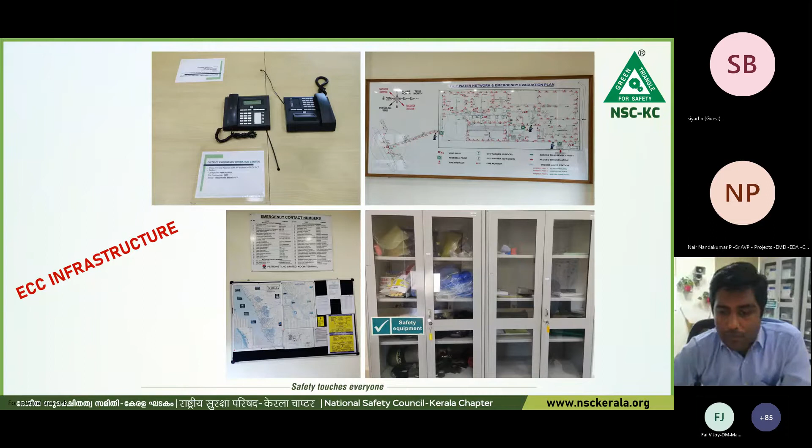We are all familiar with these terms: prevention, mitigation, preparedness, response, relief, reconstruction. All these terms are very familiar to us as safety professionals, but the challenge is to remember and apply them.

Close proximity of hazardous storage and process areas to compound walls is something to be considered during an offsite emergency. So whenever you prepare an offsite scenario, always consider the compound wall boundaries.

Also, for whoever follows OISD, there is a very good standard for layout of oil and gas installations. You can refer to OISD 118.

Even other industries can refer to OISD 118 when setting up a new terminal or industry, or whenever they do any management of change or add equipment. OISD 118 gives very good safe distances to be followed during such changes.

Press and media, fake news, and panic triggers are something to be very much considered, given the kind of media attacks and hype that happens these days on social media. Always have a single point of contact to interact with the media.

Do not allow any employees or contractors to directly interact with the media in case something happens, because minor details that go out to the media may not be projected rightly to the public. Have a single person, like your HR person or liaison officer, to contact the media.

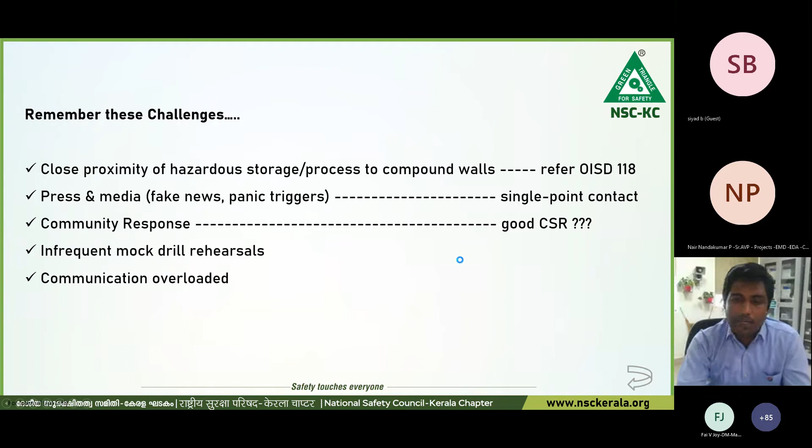The last part of the presentation focuses on the specific offsite emergency drill conducted at Petronet LNG in 2021. We'll go directly into that, with some photographs of the offsite emergency drill. The scenario was a natural gas leakage from the last point of the terminal, which is our metering area.

One of the valve glands leaked and a heavy natural gas release occurred from the send-out line. The leak went even outside the boundary wall. A few people outside the boundary got affected - the public - and of course there was some casualty reported inside the terminal also. This scenario was identified because this point was very close to the boundary.

The planning was done well before the date of the drill, as we could see from the pre-planning preparation. There were a lot of deliberations which happened. As I mentioned, we need not go into the technicalities of the scenario. We'll see how the emergency was mitigated and what all went wrong.

The scenario briefly was this: at around 11 o'clock, the main control room received report of a natural gas leakage, and an emergency shutdown automatically happened due to the detector being activated. GAIL was informed - the Gas Authority of India takes the gas from the send-out line, and they were informed about the emergency.

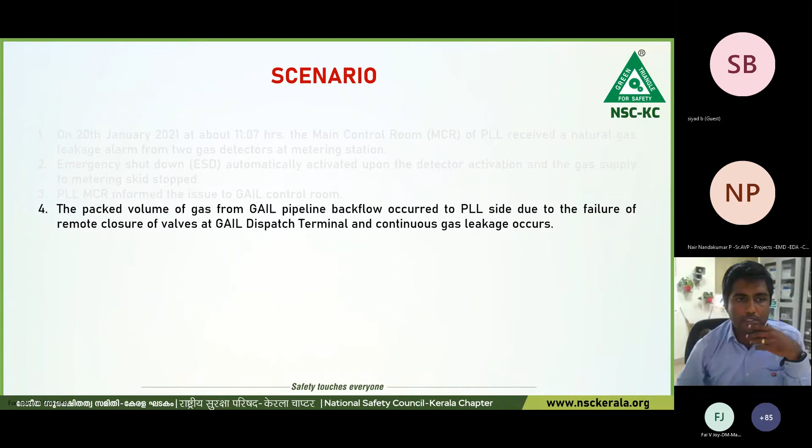The packed volume of gas from the GAIL pipeline backflowed to the Petronet side due to failure of the remote closure of valves at the GAIL dispatch terminal. So there was a failure of the valves at the GAIL dispatch terminal, and the backflow of gas happened, which started leaking from a 24-inch valve, valve 2920, from where the leak started happening.

A level 1 emergency was declared at that time. This was the scenario - you can see the photograph of the valve which was supposed to be leaking, which was considered to be leaking during the drill.

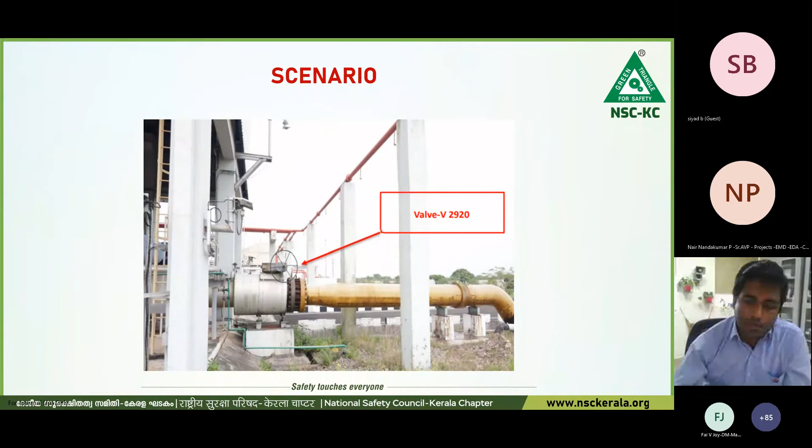There were observers from different sections of the industry. At the incident site, there were observers from FACT, from the evacuation camp, HPCL, the incident commander, from the Tahsildar response, and FACT again. IOC Kochi terminal posted their observer at the District Emergency Operations Center, and at the Emergency Control Center there was an observer from TCC, and at the hospital from HOCL.

So multiple agencies participated, and the communication flow for this offsite drill was as follows: the Chief Incident Controller of the factory, for us the terminal head, reported the emergency to the district collector or the deputy collector for disaster management through a dedicated number for the District Emergency Operations Center, DEOC. This number is well maintained and available in the Emergency Control Center of Petronet.

The only thing the Chief Incident Controller of the factory has to do is identify that the emergency is going to become a level 3, then rush to the ECC and call up the DEOC. From DEOC, the communication goes to various agencies - the police, divisional fire, district medical officer, FNB, RTO, water authority, KSPCB, KSRTC, the Tahsildars, village officers, local bodies, and supply officers.

They have various duties to be performed - I'm not going into that. All are well defined in the off-site emergency plan. This entire off-site emergency plan gets activated upon communication from the factory manager or the chief incident controller of the factory.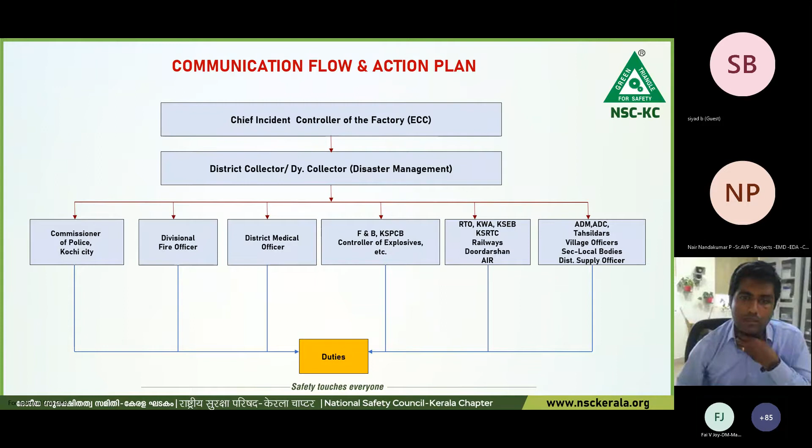The key observations and highlights of the drill were these: an incident response system was put to test. This incident response system was introduced in India in 2010 by the Disaster Management Authority, as per Section 6 of the DM Act. This was put to test, and the vision of this IRS is to minimize the loss of property.

The IRS has been constituted in the district with the district collector as the responsible officer and the deputy collector disaster management as the incident commander. So here you can see two posts or two designations: one is responsible officer, second is incident commander. The responsible officer is the district collector, and the incident commander for an offsite emergency is the deputy collector disaster management.

This incident commander is maybe a familiar term with all of us. We also have an incident commander for on-site emergency, right? Like for us, it is the shift in charge operations. Industries follow different protocols for incident commanders, but for an off-site emergency, the incident commander is only one, the deputy collector disaster management.

Some other highlights were such: there was a need for improving awareness among the local public. This observation would be common for most of the offsite emergency drills conducted in the district or in the country. We need to improve awareness among the local public. So after this emergency offsite drill, we planned a few sessions through the local panchayat to make them aware of these kinds of scenarios which can escalate to offsite areas and what the public has to do in such cases.

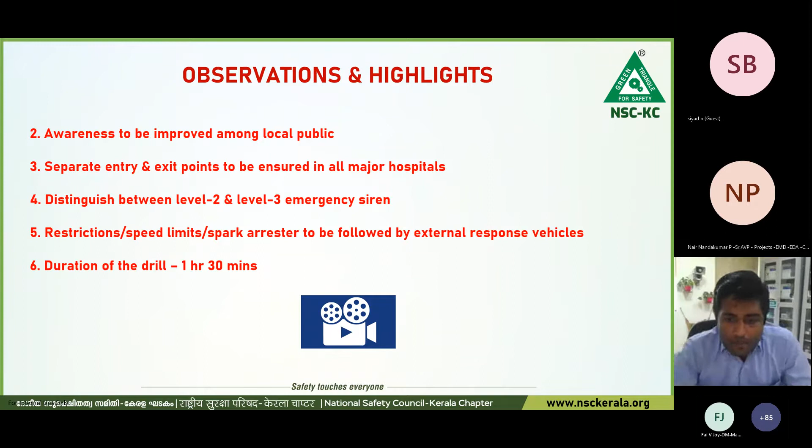With this, I'll show a small video which encompasses whatever I've told now. This video will be self-explanatory and will allow you to have a better understanding about the drill which has happened. Kindly take some time to watch the video, and then we can follow it up with the conclusion.

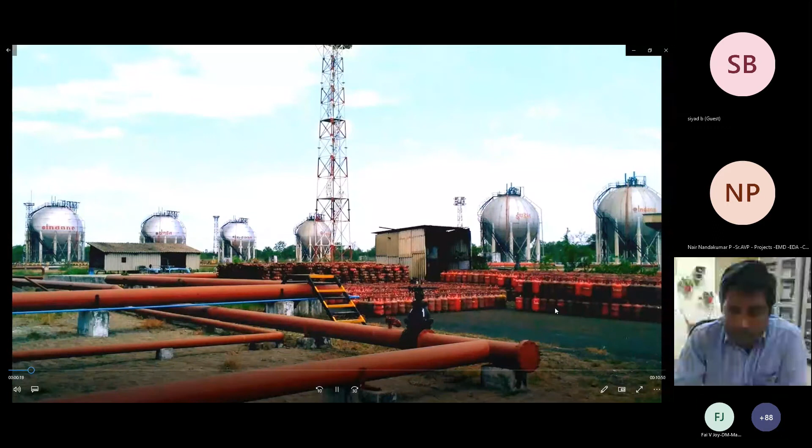Can someone confirm whether the screen of the video is visible, please? Yeah, go ahead, I will confirm. Thank you. Yeah, visible. I hope there is no voice. Sir, voice is not there, only video is there. So let me unshare and share once again, please. Please confirm if the voice is available. No, voice is not there. Let him proceed. Okay. The voice still not audible, sir? No. I paused it just to understand if the voice is available. No, Dilip, only video is working. So what I'll do is I'll keep explaining as the video progresses what has happened. Okay, yeah, I'll do a running commentary.

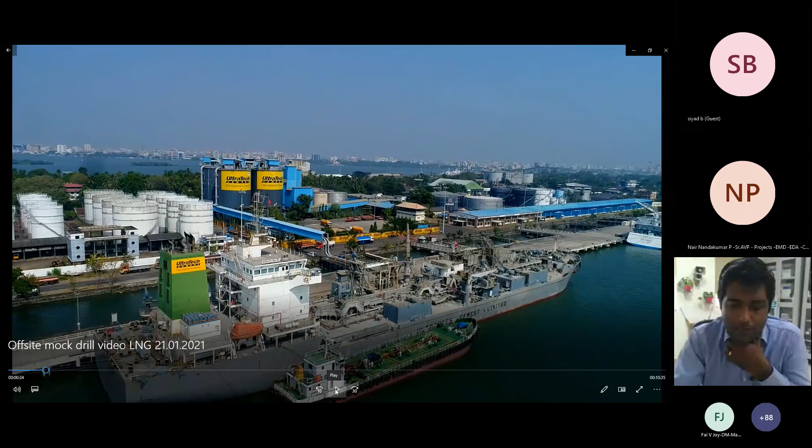This part shows the surrounding industries of Petronet LNG, the layout and the entire premises, the storage tanks, regasification. This is the introduction part.

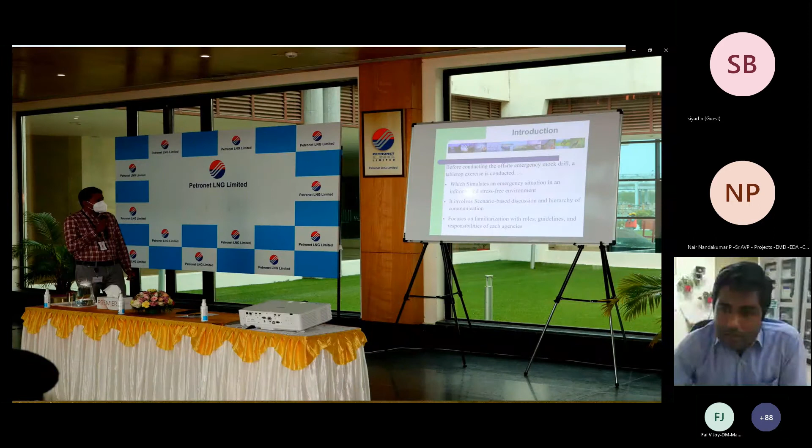We'll go directly into the drill. So this was the pre-planning meeting which happened, chaired by the deputy collector, disaster management. All the committees that are available brief about their roles and responsibilities during the emergency or offsite emergency.

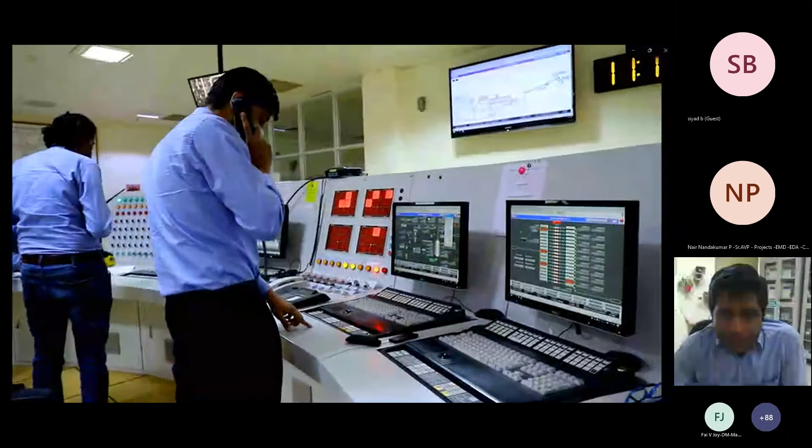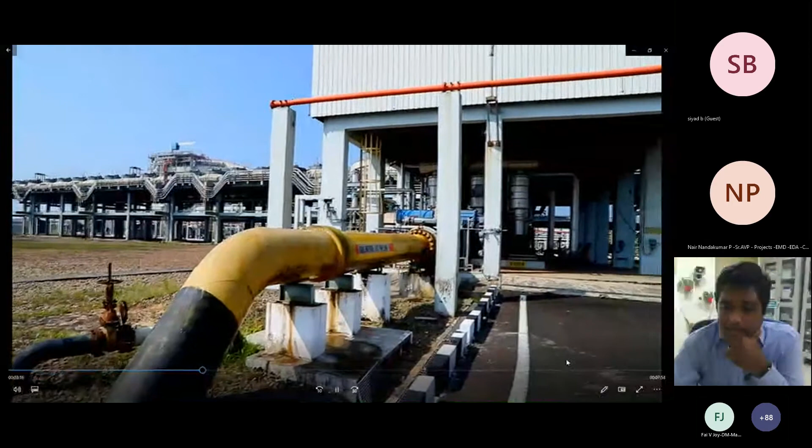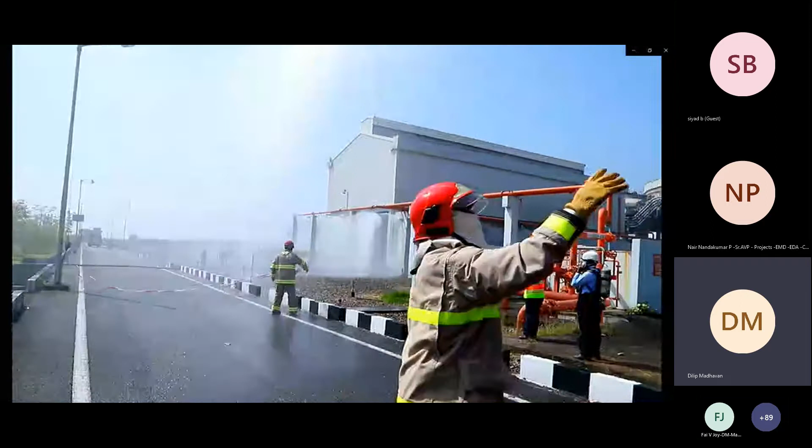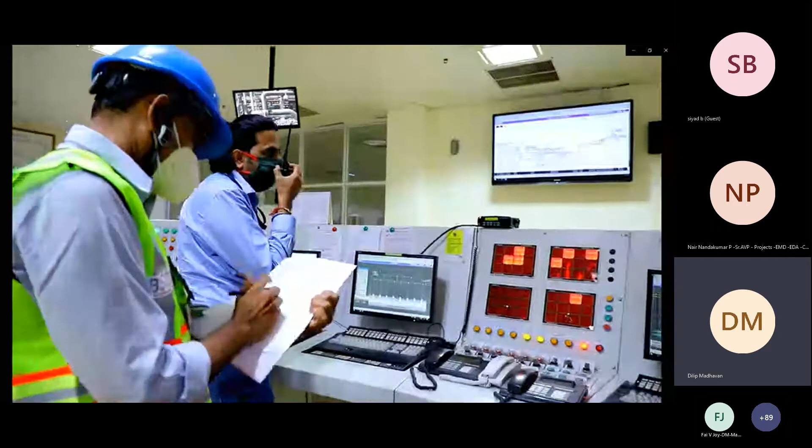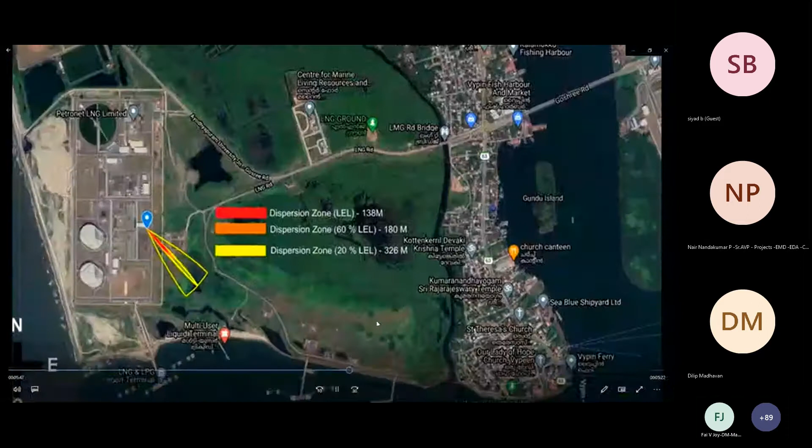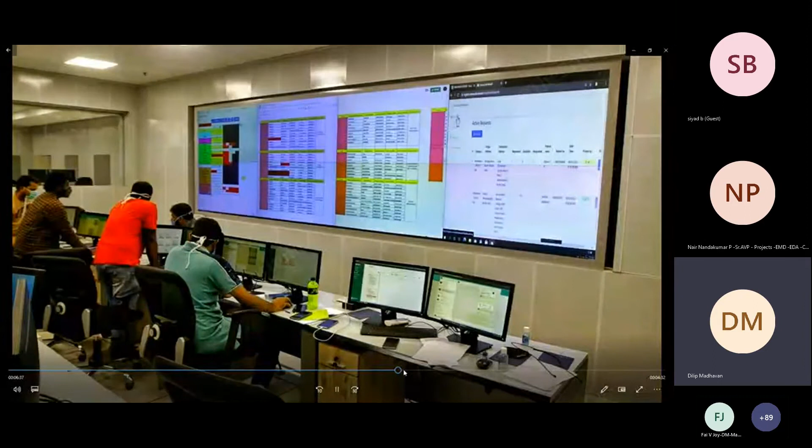The emergency control center for level 3 has now activated. Communication is given to the district emergency operations center. All the people have started getting evacuated outside the terminal. There is a single point communication between the Petronet emergency control center and the district emergency operations center. Once the communication happens, they take over the entire command of the emergency response actions and roll out the off-site emergency plan.

Emergency communication continues. Roads in the area have been blocked by the police; no vehicle traffic is allowed. The entire people in the locality are being evacuated. Rehabilitation centers outside 1 kilometer from the area - nearby schools, hospitals, and panchayat halls - are identified as rehabilitation centers. An ambulance is sent to the area to take care of casualty response requirements.